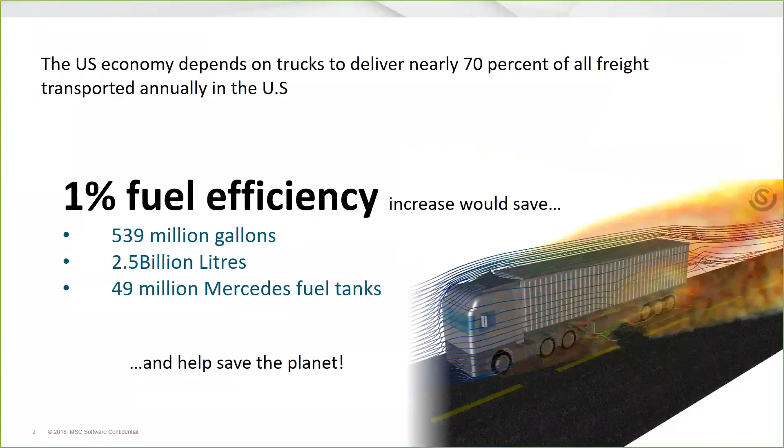In addition, there's a tremendous amount of money to be saved. If you're a fleet owner or operator, the amount of money represented in the savings that can be achieved here is tremendous. So it's in everybody's interest, for a whole bunch of very good reasons, to make sure that the way we're transporting our freight, wherever that is being done, is done so efficiently as possible.

To help that, there's a couple of programs going on, both here in Europe and also in the US. The Environmental Protection Agency, the EPA, has adopted legislation that aims to reduce greenhouse emissions not just by 1%, but by 40% by 2027. The EU is passing legislation right now to reduce emissions too, by 15% in 2025 and then up to 30% by 2030. So, of course, in order to meet those goals, we've got to act now.

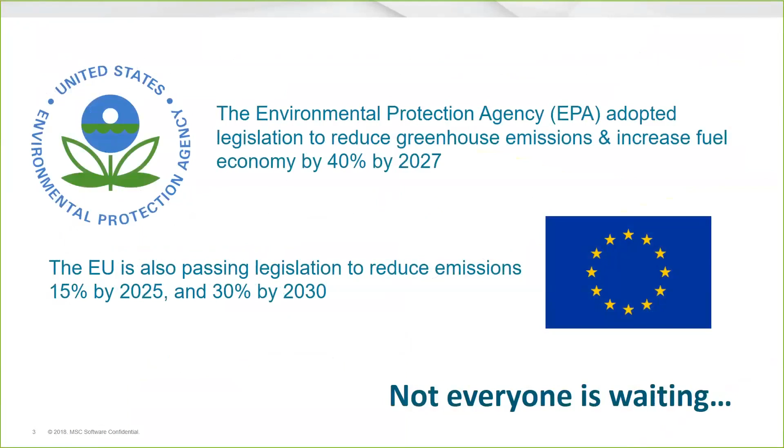And, of course, not everybody is waiting. As I'm sure many of you are aware, one of our customers, we're proud to say, from MSC, Tesla, is also doing this. Many of you have seen the truck that they've put out there, some very innovative designs, doing some very innovative things. So we've got a few companies out there doing something special. But it's up to all of us to try to make this change, not just one leading company, but all of us.

From MSC's perspective, we provide a lot of simulation software, and you can imagine there's a number of areas where we can help, whether it's drivetrain efficiency, electric and hybrid powertrain simulation, sensor and optical systems that typically go with autonomous vehicles, electronics, cooling, lightweighting, handling, rolling resistance, and of course aerodynamics, fuel efficiency, and the environment in which things are transported and people sit are all tremendously important.

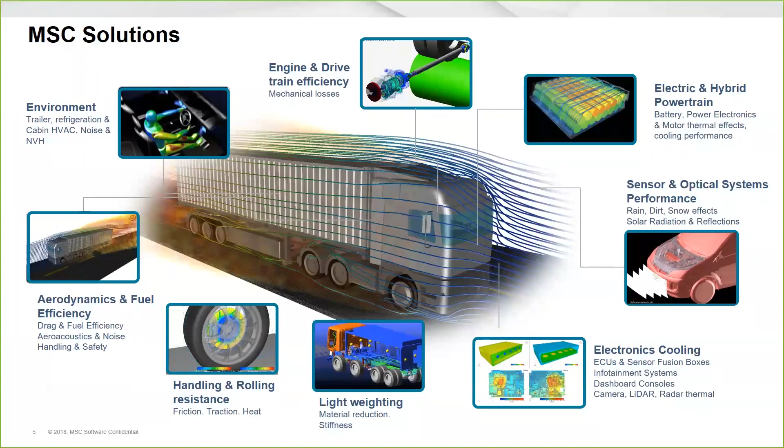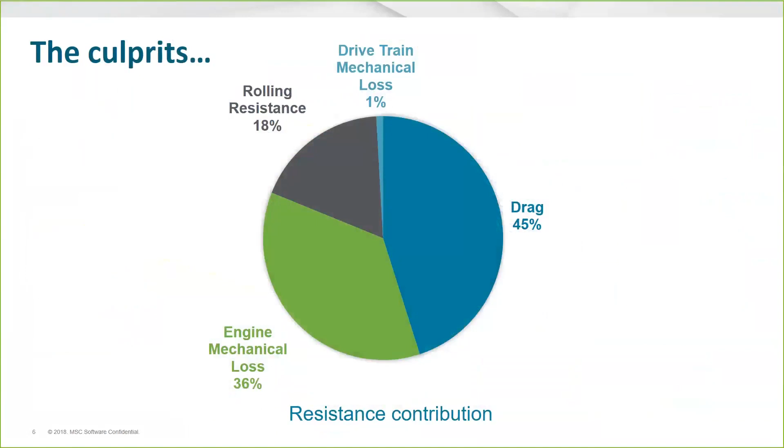But there are a couple of focus areas we need to focus on. When it comes to efficiency and emissions, some of our customers have done research, and there are some major culprits: drag, engine mechanical loss, and rolling resistance are amongst the big ones. From our perspective, we're very proud at MSC because we have two of the major solutions to solving those problems. At a very simple level, we have Cradle, some industry-leading CFD technology that we can apply to this problem, as well as Adams, the world leader in multi-body dynamics. So if things move or there's fluids involved, we can simulate them.

Not only that, we can couple these together in a rather unique way to provide a very rich, combined view of what is actually happening with respect to vehicle performance. So we believe we've got something special, and that's why we believe many companies are choosing MSC to simulate some of these things. So that's enough for the advert here.

Let's have a look at some key technology. Let's give you a demonstration of some of the key things people are doing, particularly around that core problem. We'll focus in on the aerodynamics piece a little bit and have a look at what we can do with some key capabilities we have here at MSC, and give you some insight as to what some companies are doing, particularly around aerodynamics.

So Max, are you still there? Yeah, I'm still here. Shall I pass you the ball and you can present? Yeah. I'm waiting.

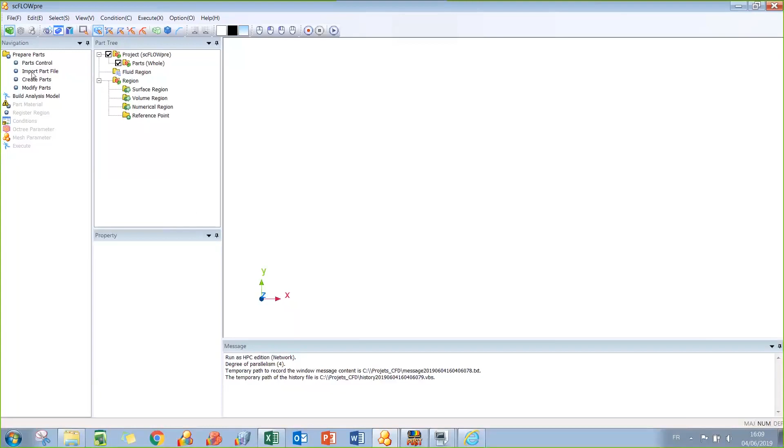For that you can use neutral files such as Parasolid, native files, or so on. In this case I will just take Parasolid. But of course, depending on where you are in your project, if you are very upfront or if you are more advanced, we would recommend you to use different level of detail for your CAD geometry.

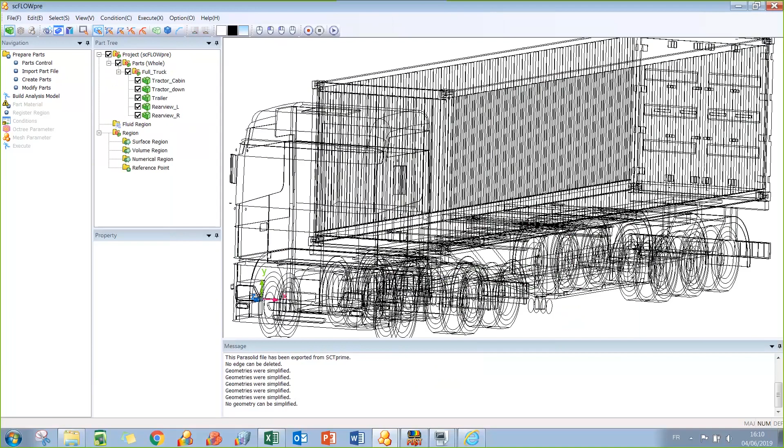If you are more in a design variation process, for sure we will advise you to use a simple model, like the one I'm loading here now on my screen. But of course, if you are more advanced, if you are more looking for validation, we would recommend to put more detail in your CAD geometry.

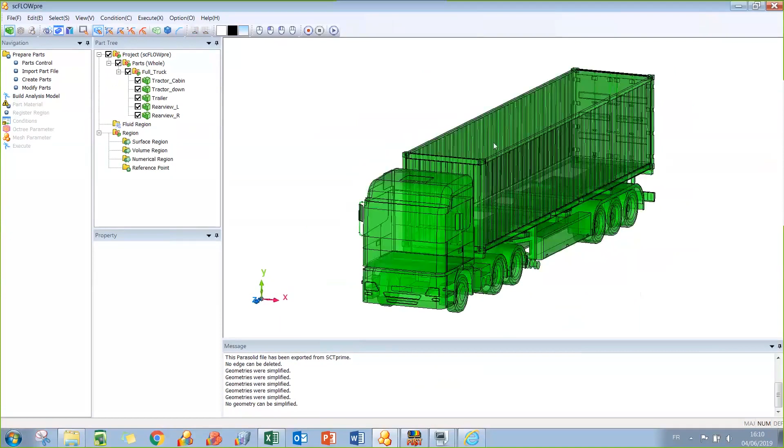So let's try with this one here. As you can see, I have my truck with a few details, but it's a basic truck and trailer model here. Of course, this is what you get from your CAD software. But since we are dealing with CFD, we will also be interested about the surrounding of this vehicle.

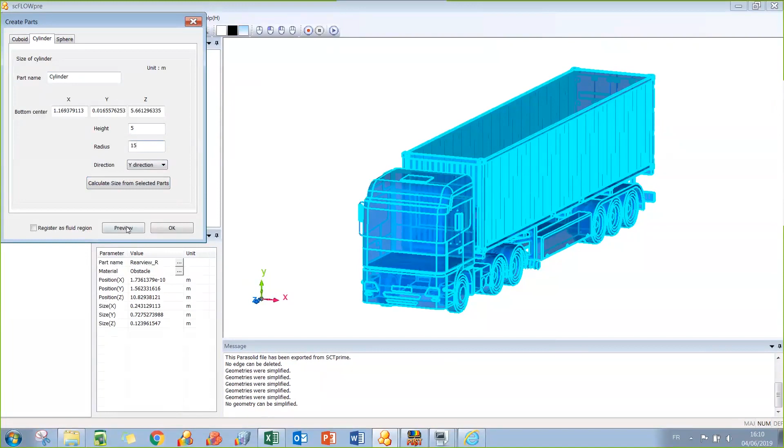So for that, we can create a volume around this truck. Let's say, for example, something like this. Let's check. Yes, I think it's enough for this demonstration at least. So let's consider this volume of air surrounding the vehicle.

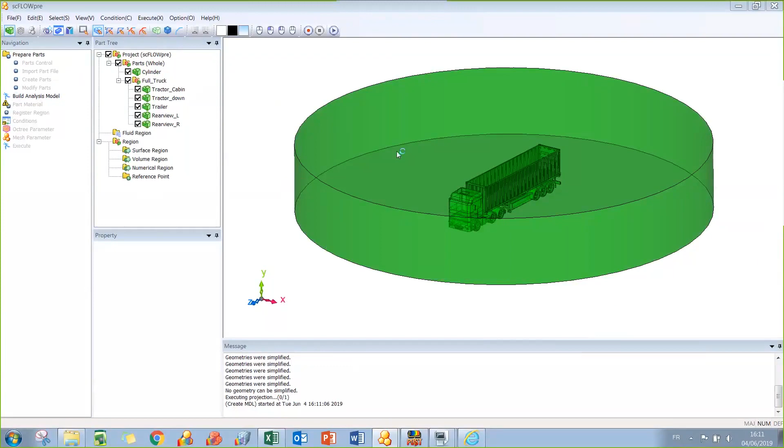And now the next step is about checking if the CAD data is clean enough or not to go till a mesh without any problem. Because, and this is a previous user of simulation solution talking, there is nothing more frustrating than setting up the whole simulation, and then at the final step, the mesh, you get a pop-up message telling you that you have CAD issues, so you need to go back to the CAD software to fix the issues, and then come back to the simulation solution, and then reset up once again.

It means that you have lost your time on the first try. So here the good news is that at this early stage, you are able to check if the CAD data is clean enough or not to go till the end without any problem.

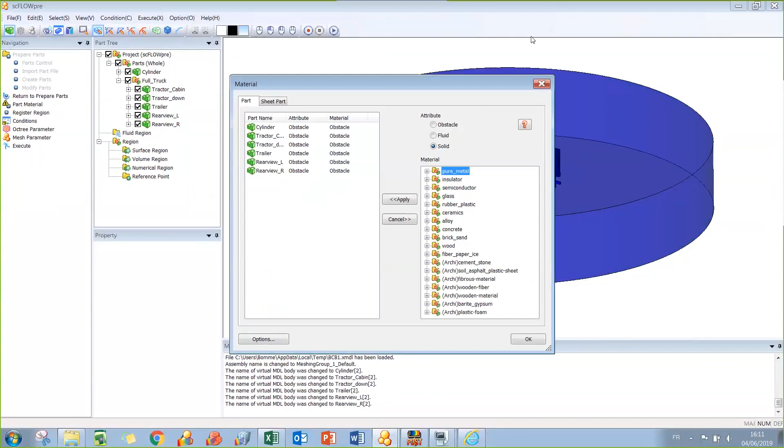So once you have checked this, we'll deal with the material that we want to assign to the different bodies here in the model. In this case, it's very simple because we'll just assign a fluid property for the surrounding volume. So let's keep it simple here, air around the vehicle.

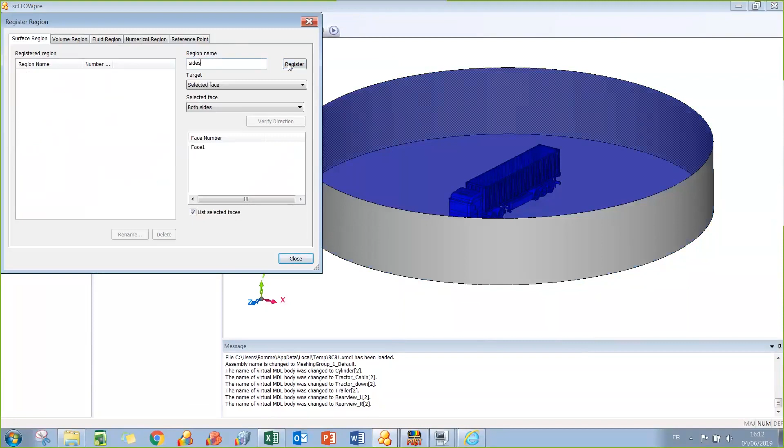Then we'll register regions. For us, a region is one or a group of surfaces that we want to clearly identify. It can be for applying boundary conditions, it can be for meshing purposes, it can be also for post-treatment. So let me show you. For example, here, I will just register the sides, the road, the top, but also the vehicle itself. Let's say, for example, here, as a whole thing, this truck.

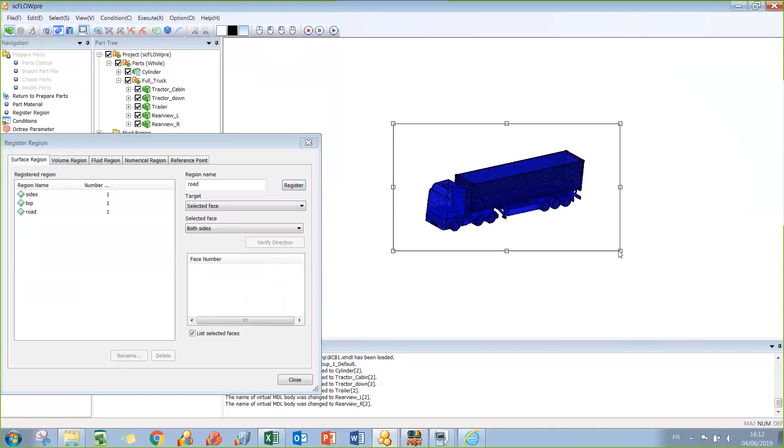Okay, that's it. And now I'm able to set up the simulation itself. So for the setup, we have this wizard, so don't worry, I won't detail each panel that you have here. I will just show you the main ones that can be useful in this specific application about aerodynamism.

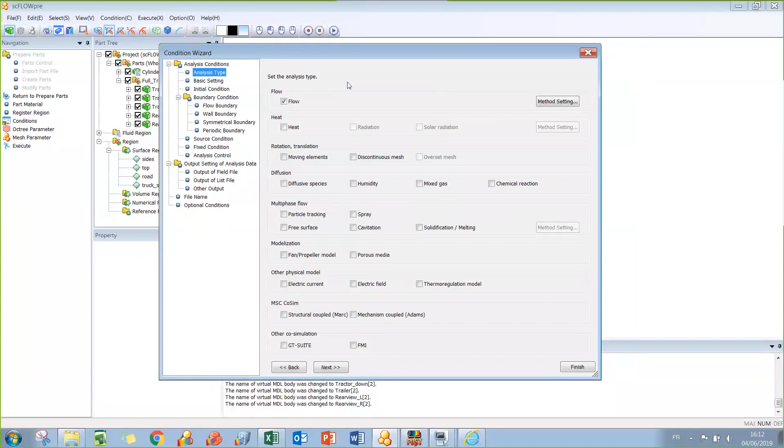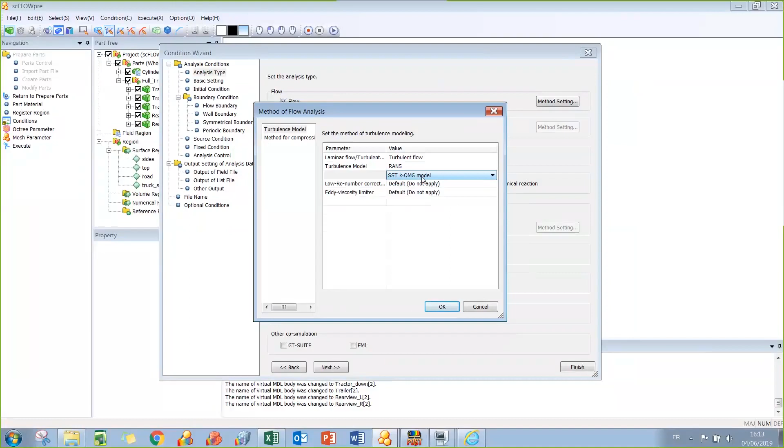So here, the first panel, analysis type, is where you choose what you want to be solved during calculation. For sure, in this case, we will be interested about flow calculation, and you can also go to advanced settings, for example, to choose the turbulence model that is maybe more efficient in your application. The good news is that the default model here, SST K omega model, this is a default one, and it perfectly fits the need for the aerodynamism application.

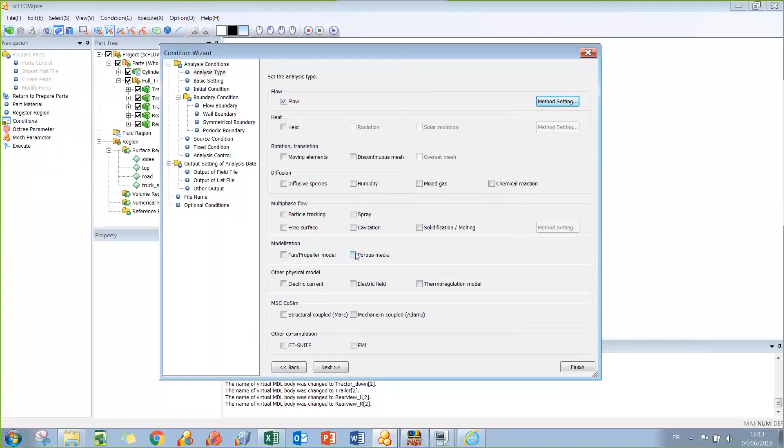So we'll keep it this way. Still in a design variation perspective, I would say this default parameter can be fine. Of course, if you are on another level of detail, if you want something really detailed for validation, maybe you can use more advanced features such as porous media, for example, to easily take into account the influence of the underhood, so here in this case, maybe the cooling system of your truck. For that, you will just consider a resistive volume here, considering the flow resistance induced by this specific area for the airflow.

So this is for the analysis type. Now let's speak about boundary conditions.

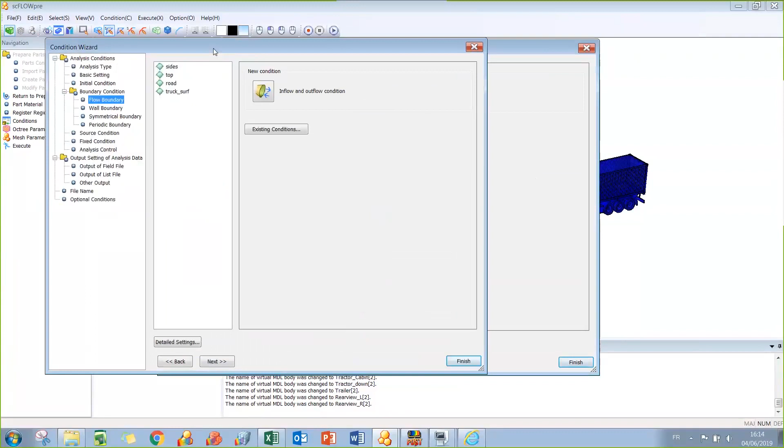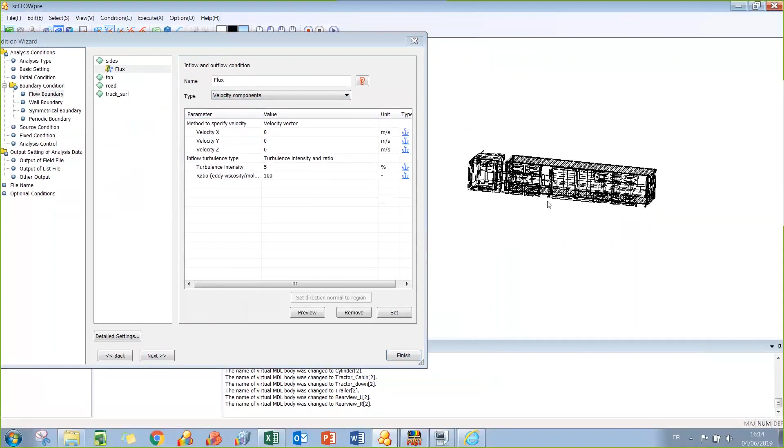Here we rely on the regions that we have registered previously, so we can specify to the solver what's happening around our truck. On the side of our domain, we can specify, for example, the velocity of the wind acting on the vehicle. For this, we'll consider the rolling speed of the truck itself. So let's say, regarding the axis, maybe we have something like 25 meters per second. It's a standard value for experimental characterization, for example. So this is for the rolling speed of the truck.

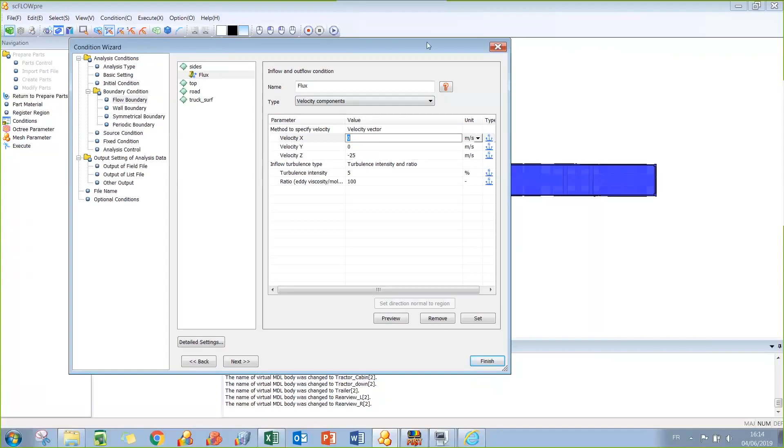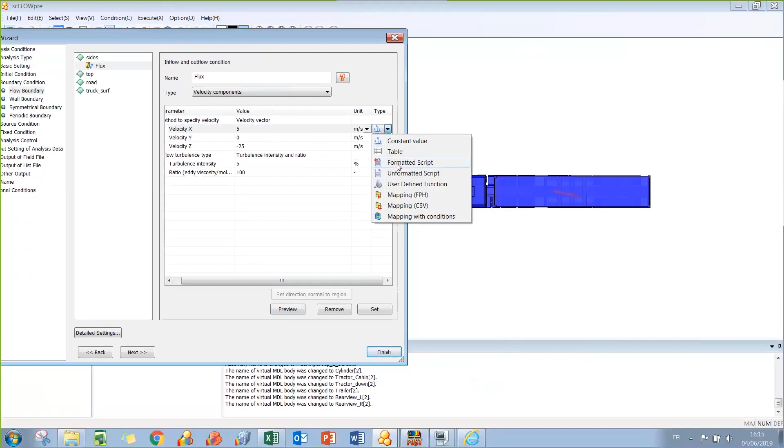But more than that, you also have to consider the natural wind speed, what we call crosswind, because it's not always aligned with the vehicle path. So maybe, for example, let's do it this way: we can consider the rolling speed of the vehicle and, in addition, a natural wind coming this way. The interesting point is that experimentally, you get data from several different wind directions. Here you can set up really easily the range of wind directions you want to test. I've put one value here, but you can easily automate it so that with one simulation setup, you can get a multitude of results corresponding to different wind directions.

So this is for the wind. Maybe on the top level of our domain, we'll just consider something like atmospheric pressure. For the road itself, we can consider that this will be moving according to the rolling speed. That's it, so this is for the boundary conditions.

Of course, you can also access the numerical aspect of the solver if you want to tune it a little, or not. Once again, the default settings perfectly fit the need for this application, so that's good news.

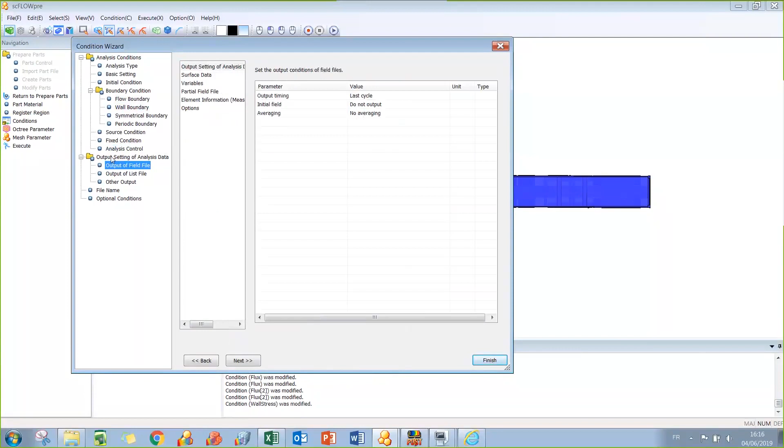Now let's talk about the output we'll get from the solving. By default, you will get pressure distribution, velocity of air, turbulence, a lot of useful information, but you can also ask for more specific results for your application. For example, we can ask the solver to automatically calculate the force applied on our model. This is why we registered the truck and trailer as a region, because we can ask the solver directly to calculate the drag force applying on the vehicle.

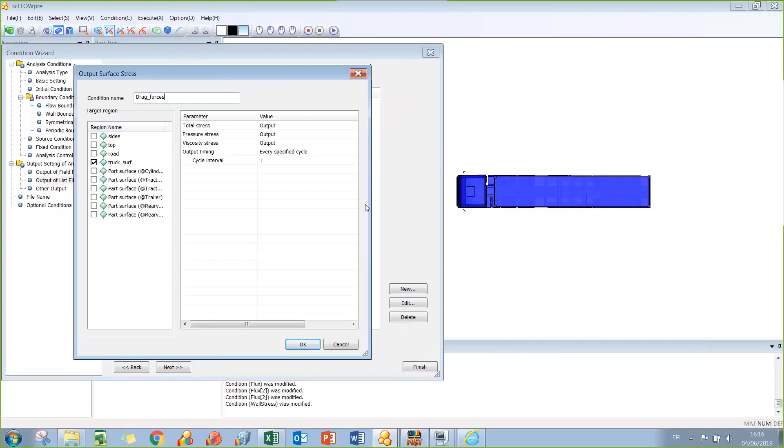In this example, I consider the vehicle as a whole, but you can certainly split your model into different areas if you want to look in detail, for example, at a device you want to put on your vehicle to reduce drag force. So this is about the setup.

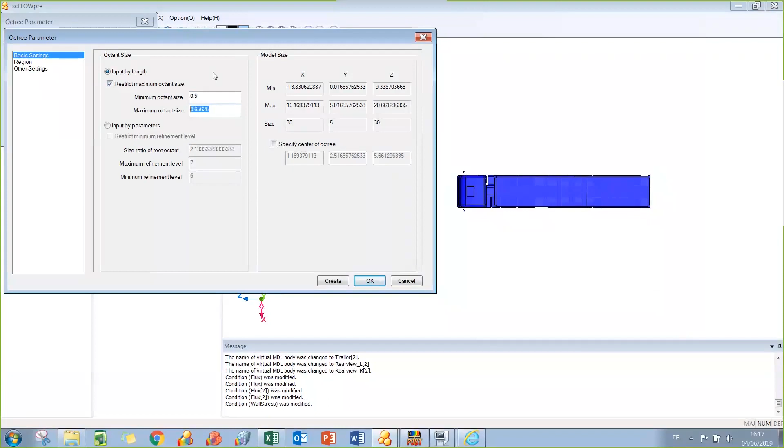Now let's talk about the mesh. For the mesh, we do it in two steps. The first one, we will set the local mesh densities on the model. For example, let's use a cell size between 0.5 and 1 meter elements.

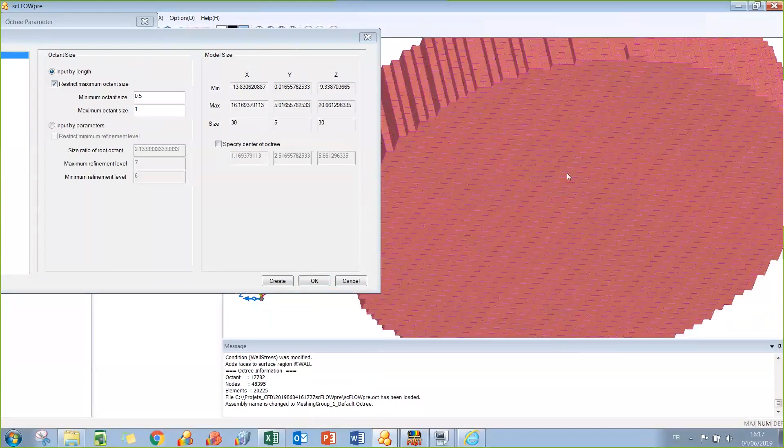Let me show you a quick preview of what that means. Don't worry, this is not the mesh we'll actually use for solving, it's just a preview to get an idea of the coarseness or fineness of the mesh. With this kind of cell, we'll miss a lot of accuracy, especially around the truck. That's where the regions can be helpful, because we can ask for specific regions or volumes to have a finer mesh.

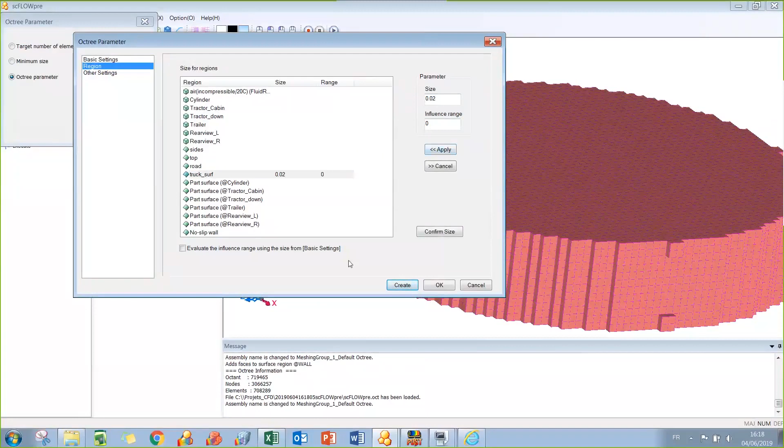So let's say, around the truck itself, I want something finer, like a 2 centimeter element. I'll just recreate this preview. By the way, we also get an estimation of the number of elements, so we know if we're creating a monster or a light simulation. Let me show you what we get around the truck. As you can see, with these parameters, I get something finer around the truck, my main point of interest in this application. So this is for setting up the local mesh density in the model.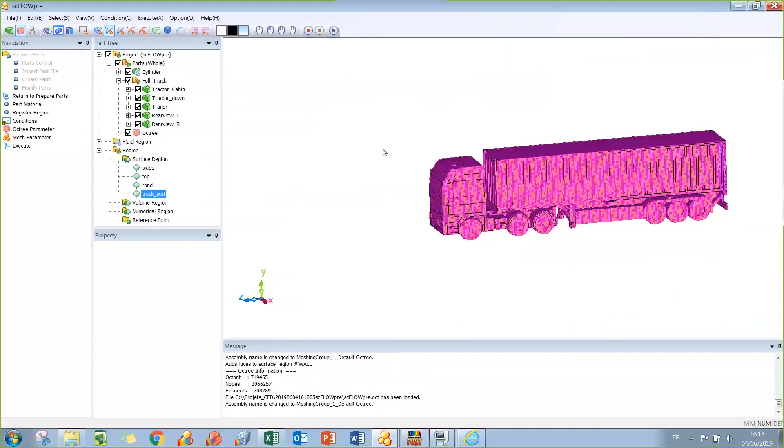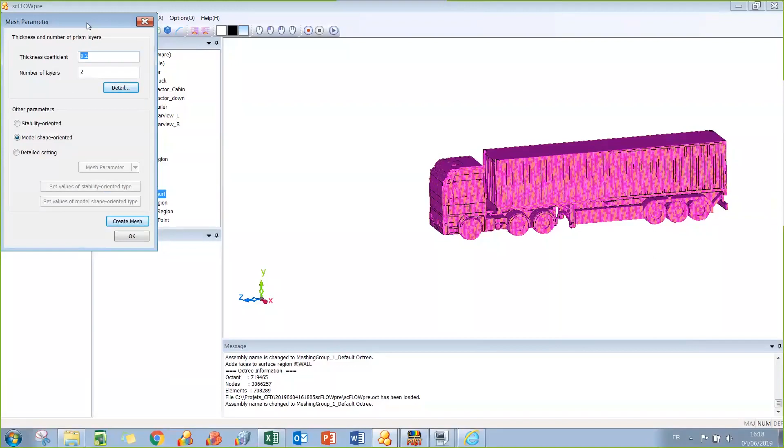Now the second step is about the mesh itself. For the mesh, we use polyhedral mesh at the core of the model, and near the walls, near the boundaries, we'll use what we call prism layers. This has a higher aspect ratio that helps us really catch the physics occurring near the walls. For example, near the surface of the vehicle, we'll get huge gradients of velocity, pressure, and so on, so to catch this physics, we use this kind of element.

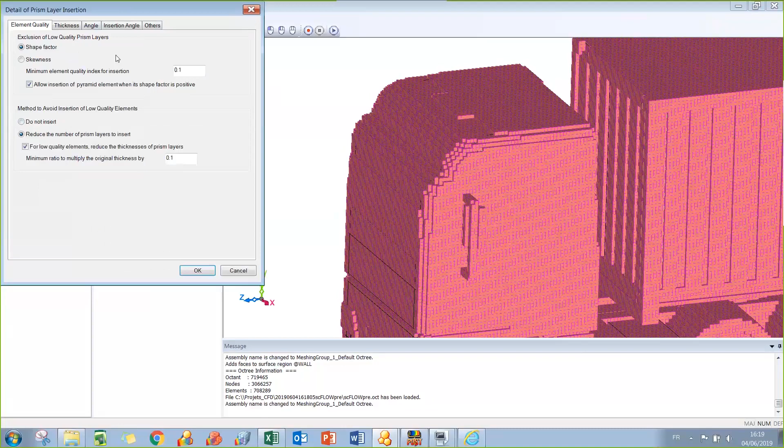And then we can specify here the number of prism layers that we want to use near these walls. We can also rely on existing pre-configurations already saved in the program, but you can also access and tune your own parameters. So you can access any kind of parameters that you can imagine to check and control the quality of elements in your mesh.

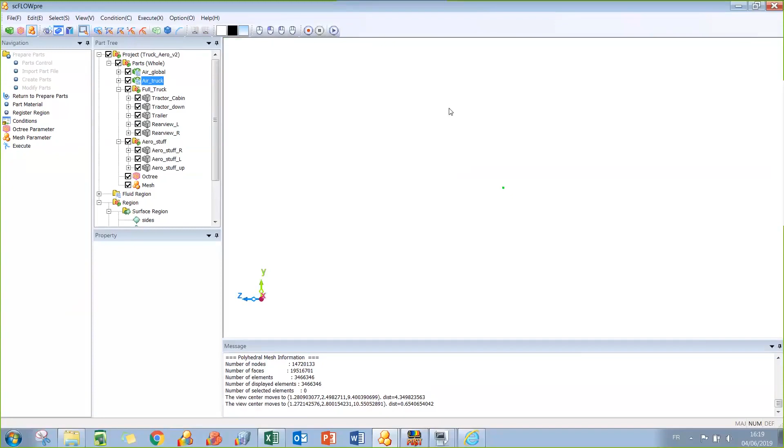Let me show you an example of mesh that we can use especially in this case. This is the same model of truck. As I said, we have polyhedral mesh at the core, and what I just described, prism layers, in order to catch high gradients of speed or pressure near the boundaries.

At this point, everything is ready for calculation itself, and during the calculation you will get a kind of log file like this one. In this log file you can find the drag force that we have asked the solver to output. You can monitor the total drag force applying on your model, so here on my vehicle. This drag force is directly something you can use to quantify and check if your solution is aerodynamic or not.

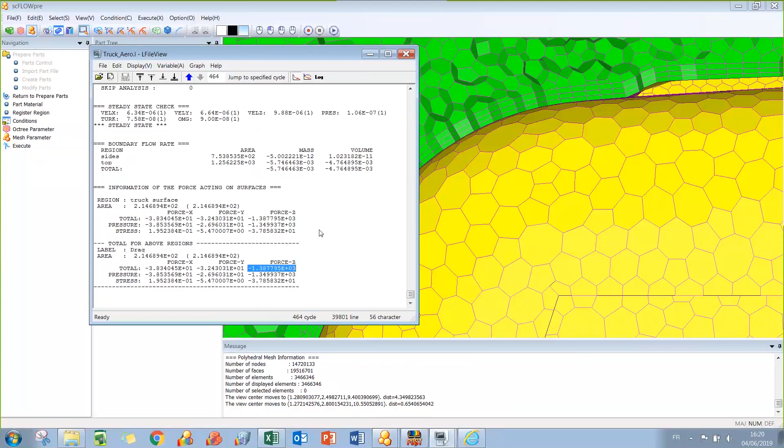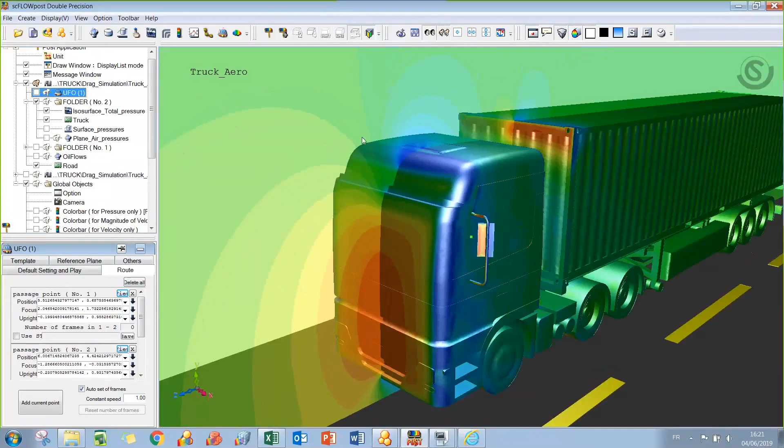Of course, after the calculation is complete, you can access the post-treatment itself, like here. We can check, for example, the pressure level on the truck itself or on the air. High pressure level stands for airflow resistance and energy losses. We can check this pressure, and we can also check low pressure level in the air, also standing for pressure energy loss areas.

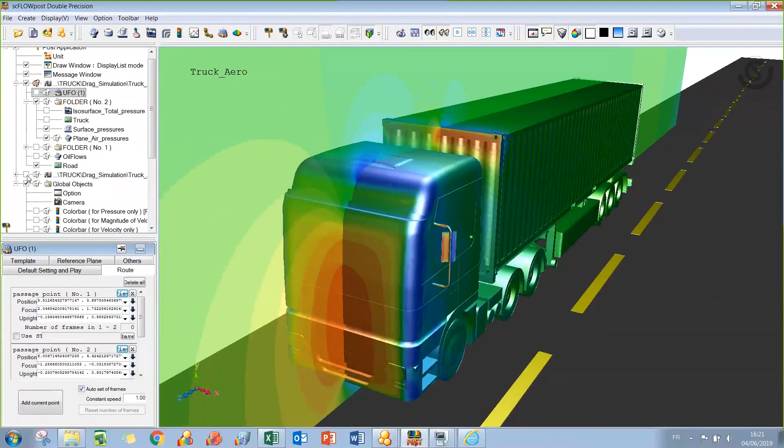Let's come back to the pressure themselves, and let's consider that we are in design variation. So maybe we have run a few different configurations of this truck rolling. We can easily compare directly different configurations.

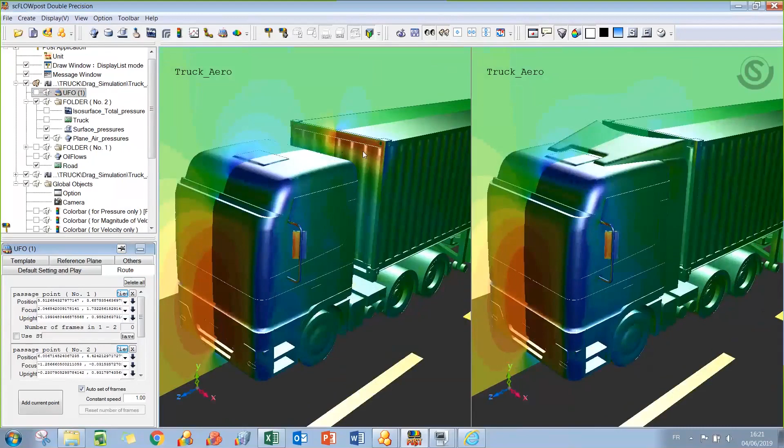Let's say, for example, in this case we have a configuration without a cap and here with a cap. We can directly check if this device is efficient or not in terms of pressure applying on the truck. Once again, the pressure stands for energy losses, and thanks to this we are able to check if these devices are worth it or not. This is completely the idea of design variation, to check if something is going in the right direction or not.

As you can see here, for example, we have high pressure areas here and here. Thanks to this device, this fairing, this simple fairing, we have suppressed this area of trouble in terms of aerodynamism. So it's very simple to check if we are going in the right direction or not.

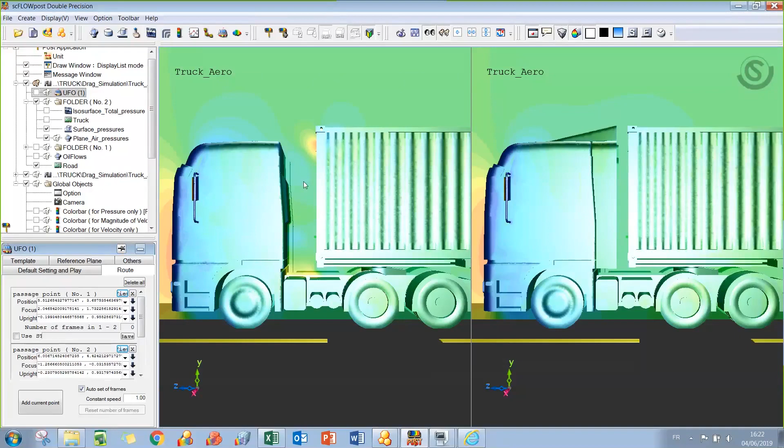But more than that, we'll also be able to directly quantify the amount of benefits, if any, in the implementation of this kind of device. As you can see, you can directly compare from the first configuration without the fairing, we get an amount of force acting on the truck. And here, with the configuration including the fairing, we can see that the force is reduced by something like 20%. And these calculations are really fast to run.

For example, on an 8-core machine, one single calculation lasts something like 45 minutes. So as you can see, it's not a big deal. And in this, let's say, one hour, you are able to check if this fairing is worth it or not in terms of aerodynamism.

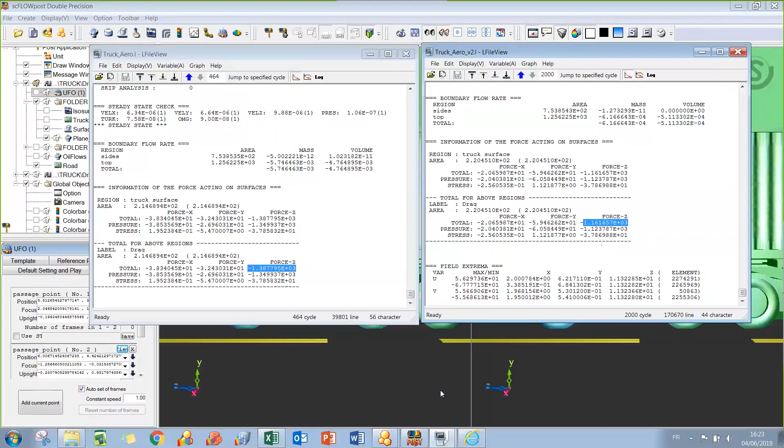Hopefully you can see my screen again. So a simple demonstration, a very interactive demonstration of what's possible with something like CFD. There's a few hints and tips that Max provided, a few levels of automation that we provide. Obviously, a relatively simple demonstration, and no co-simulation there. We didn't do much in the world of optimization, for example, and we didn't do much in terms of automation that can be applied. We'll come back to those things in a minute. It's just a simple outline of what's possible.

All right, so let's start looking at what real-world examples are out there from what real customers are doing. One of my favorite examples is actually from my Japanese colleagues with a company called Hino. Here they're doing truck and bus aerodynamics as well. Just like Max said, they're also doing a lot of drag, crosswind forces, that kind of work. But they're also looking at what's going on inside the vehicle, particularly around the engine and some of those other areas that were outlined at the start of this demonstration, to improve the situation. Things like catalytic reduction, particulate reductions, as well as the refrigeration systems themselves around these vehicles.

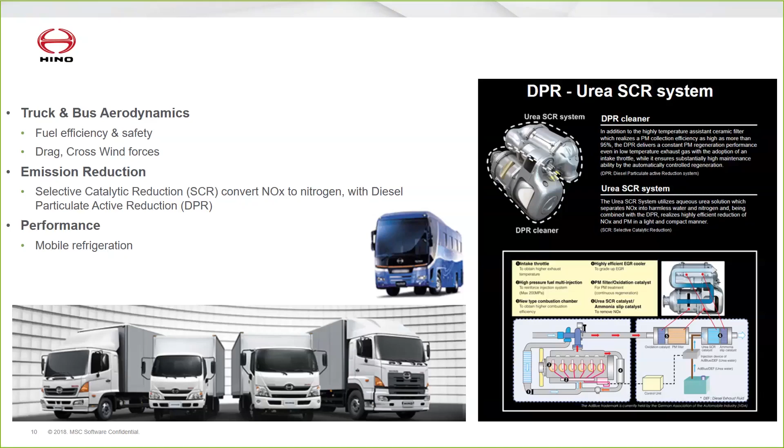It's not just one thing that's going on. There's a number of things combining to impact the overall efficiency of these vehicles. And it's that kind of idea that Hino have embodied very well.

So on one side of the equation, they've spent a lot of time looking at the processes they have around the aerodynamics of their vehicles. Like Max said early on in the process, they're doing relatively simple design shape variations. Then, as their designs come into more focus, they're adding more and more detail and validating more and more. The designs up front are quick, simple, relatively dirty to get overall design intent working. Designs later on, obviously there to quantify specific design ideas.

You can also see that particularly around those validation points, they're comparing back to simulation, to actual physical tests as well. So what they can do is reduce significantly the amount of physical prototypes that they do and correlate those together. The result is a pretty powerful one, right?

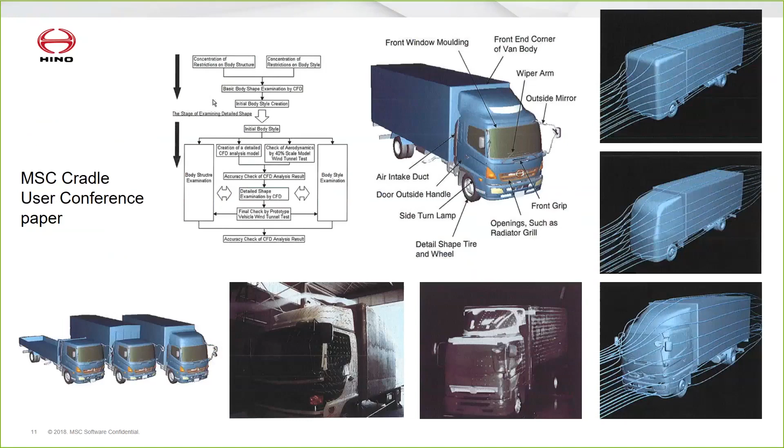In addition to simulating crosswinds and being able to understand different variances in geometry, they're also able to map out the drag coefficient against fuel consumption for their prototype vehicles for different configurations of every vehicle that they have. That's pretty powerful stuff. This enables them to make design decisions before anybody's actually in production and try to address some of the key things their owners are going to be looking for. Fuel consumption being a key one, and increasingly, it's going to be emissions calculation information moving forward.

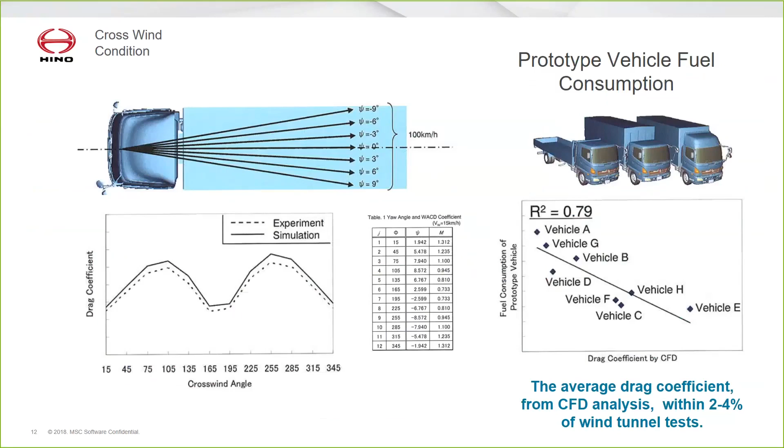You can also see from this slide some of the correlation they've got with their actual wind tunnel tests, 2 to 4%. That's pretty accurate. So a really nice example of aerodynamics as well as some detailed examples around the engine.

Speaking of engines, another example I particularly like is from ISUZU. Here, ISUZU have embedded quite a bit of detail into the CAD solution themselves, choosing to take their standard processes and make those processes available to more designers and engineers, removing the restrictions around some of the usage of these tool sets, since some of them can be a bit complicated. So all of a sudden, we're enabling regular design engineers to get access to these tool sets and start producing standard simulations again and again and again.

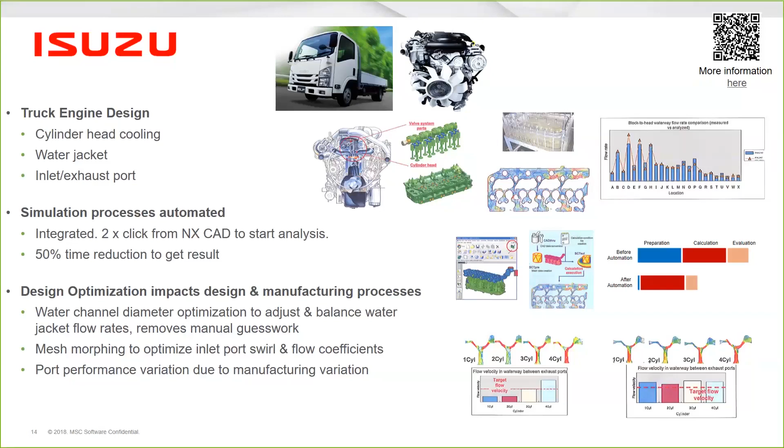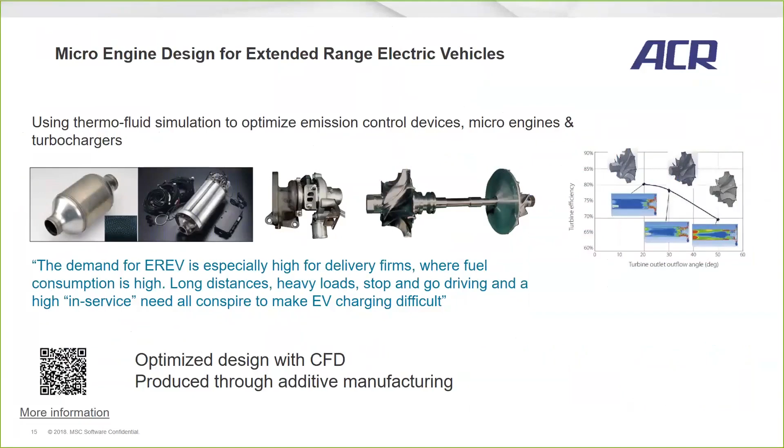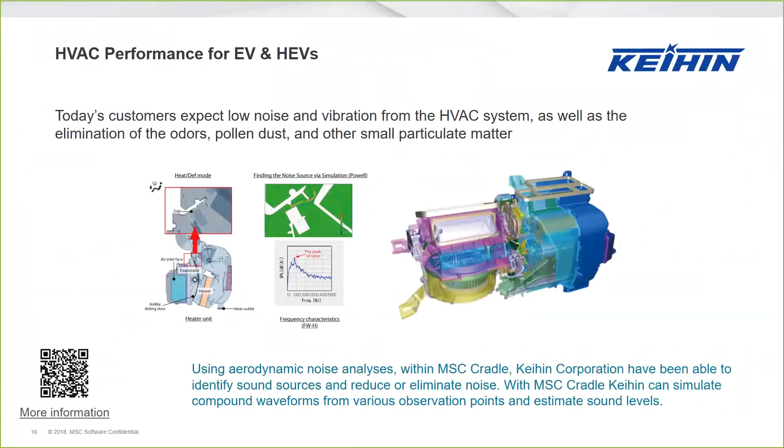Simple example there, really nice example. All of a sudden, you've got quieter vehicles. All of a sudden, things like HVAC become increasingly noisy. It's obviously very fluid examples so far.

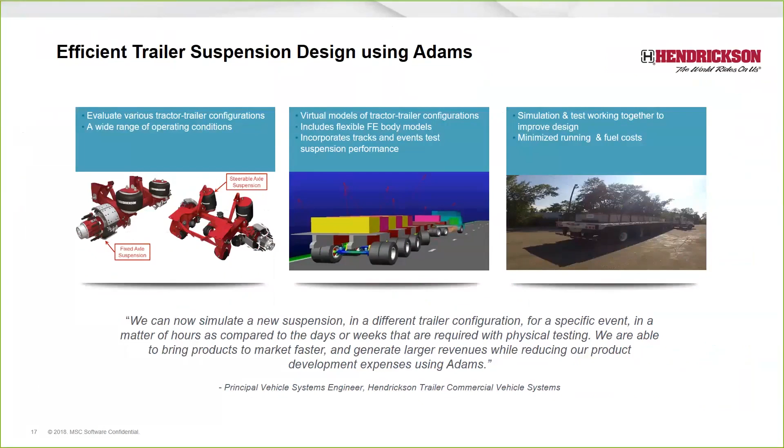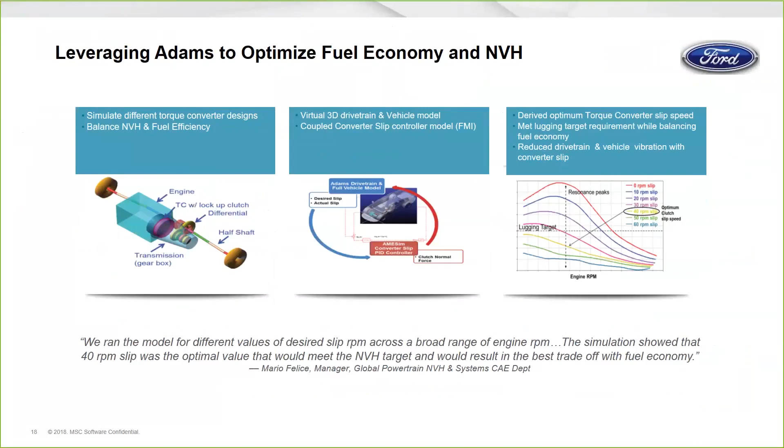Another great example here, bringing together that engine viewpoint, is from Ford. Here, leveraging Adams in this particular case to optimize fuel economy with NVH. So being able to simulate different torque converter designs in the engine and the drivetrain to optimize those, make them as efficient as possible, and really balance what's going on in the system, particularly bearing in mind some of the converters that they've got going on. That way they can optimize torque converter slip speed, and balance fuel economy and noise. Some really quite interesting use cases in this particular example.

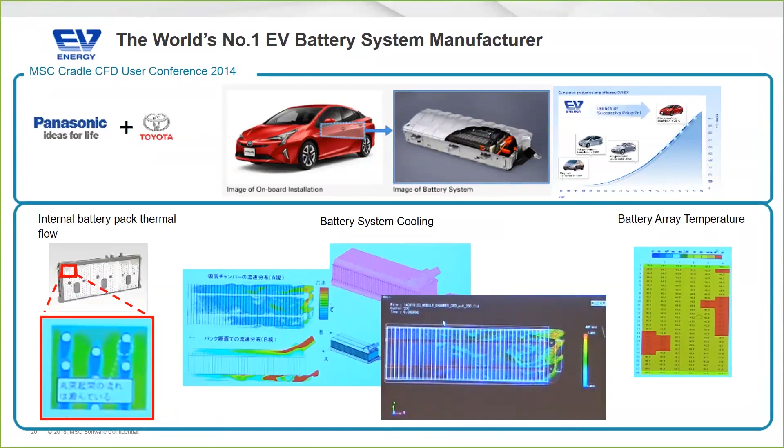Another great example that we've seen back in Japan is what's been going on with Toyota and Panasonic. In both cases, great users of our solutions, particularly for CFD, now getting together to produce one of the world's largest providers of electric batteries. In this particular case, we're using a Prius. This is from the Cradle User Group Conference 2014. If you drive a Prius, then you'll be glad to know that MSC helped simulate the Prius itself for the cooling system that goes around the electric battery. The battery itself is produced by Panasonic, another great user of Cradle. They're simulating the flow through the battery, so both through the battery and the cooling system around it. We've got quite a nice set of capabilities here to optimize the engine. So, all nice case studies.

What are the lessons learned? One of my favorite papers on this particular subject is from the International Council on Clean Transportation in the US. They've derived something called the US Supertruck Program. I'll bring that up so you can see it.

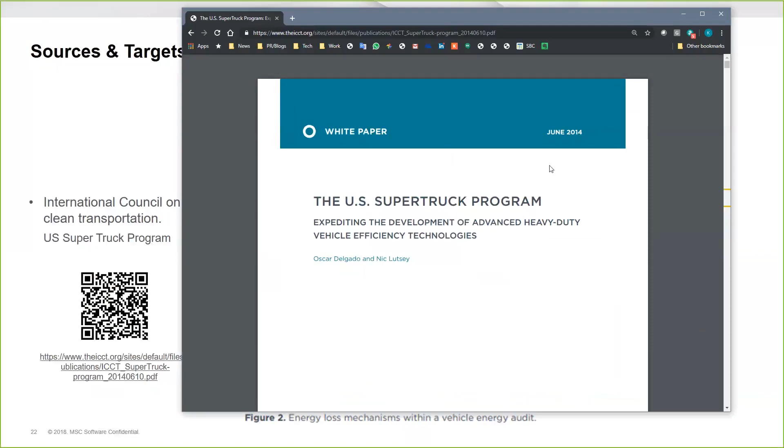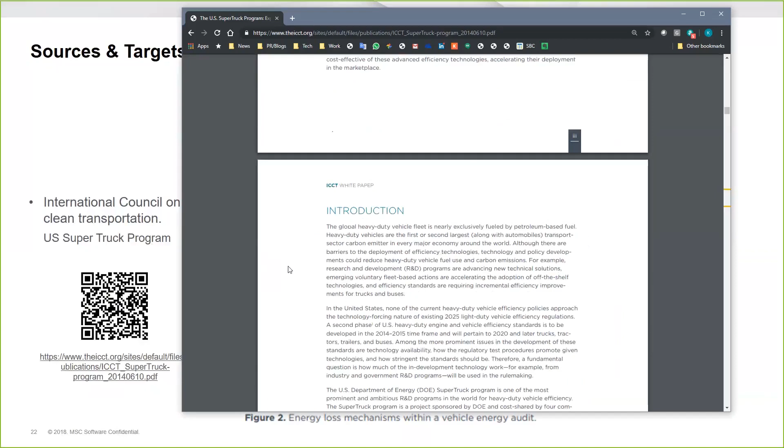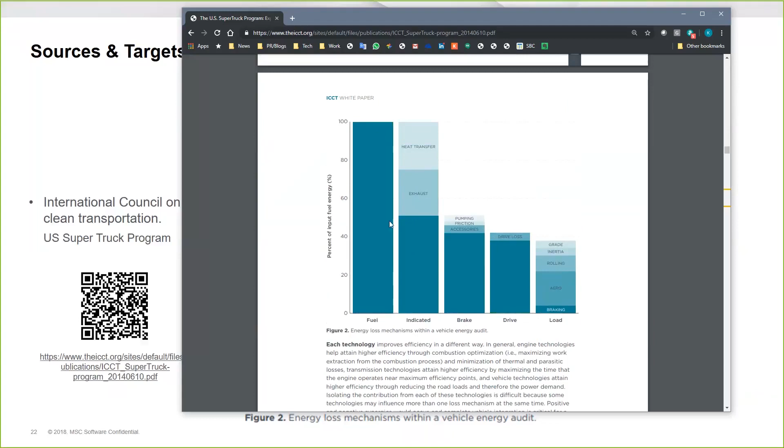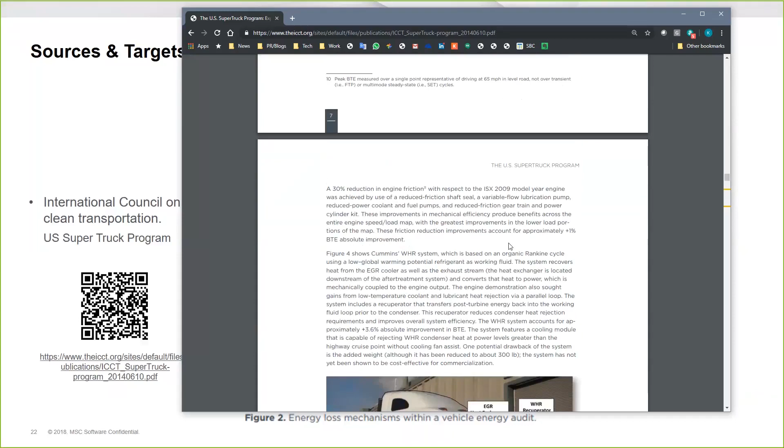And it's got some great detail on that. Here you can see the breakdown of the energy that comes from the fuel to where it actually ends up, what happens in the braking area, drivetrain, loading, and so on. So it provides some really neat examples of where we can find that efficiency, some good examples of specifics around what some of these leading companies are doing.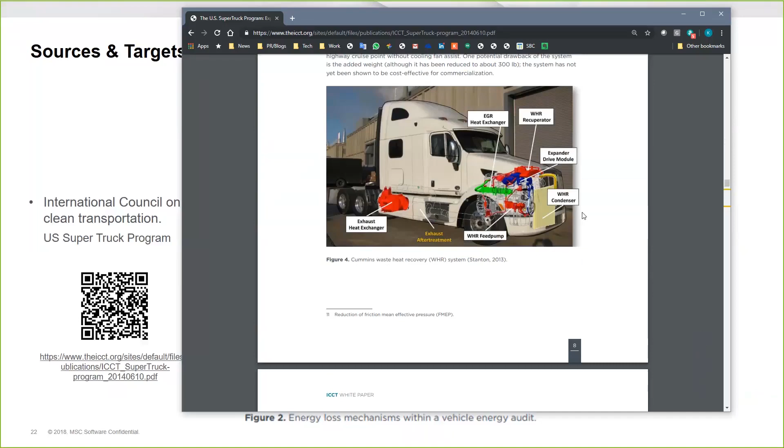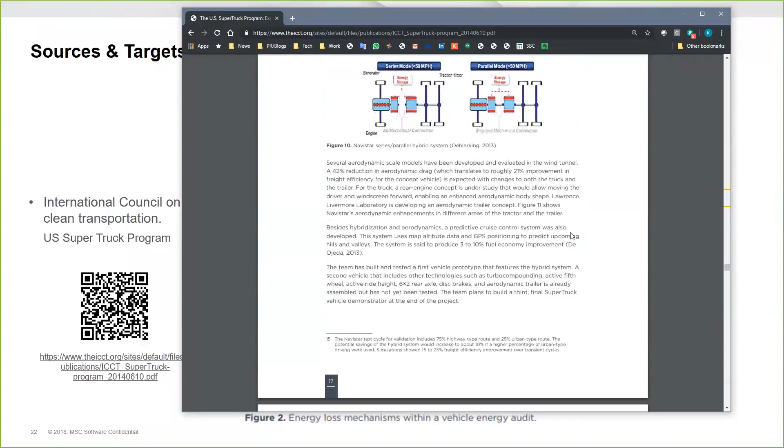In terms of engine design, you can see some of the equipment and systems around the engine that has to be balanced, as well as aerodynamics, for example, and other leading things. So it's a really nice example, really nice white paper - if you haven't seen it, I recommend it. You can see some great designs here with aerodynamics. Worth a read if you haven't seen that already - the International Council on Clean Transportation. Great paper, there's a number of other papers like this.

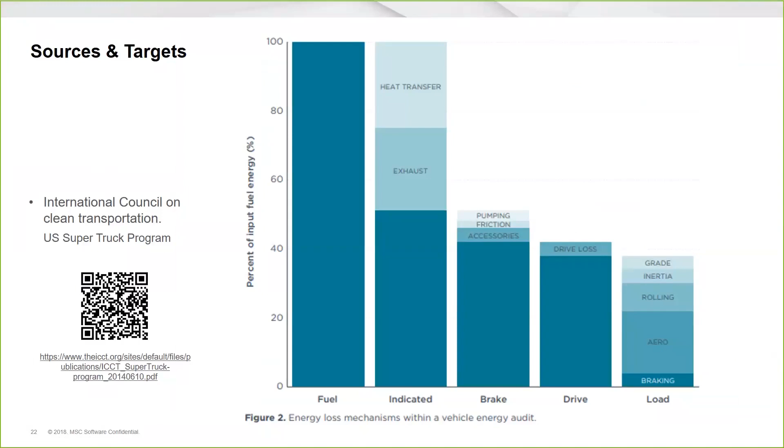This happens to be my favorite, because as you can see in this particular chart, it's not just about aerodynamics. However, I do lead CFD here in EMEA, so it's not all about aerodynamics, but this particular paper does outline that one of the most cost-effective technologies that can be applied here are those related to aerodynamics, in particular the combination of truck and trailer. I know this is kind of obvious in hindsight, but we've got companies that make tractors and companies that make trailers. Unfortunately, in order to move something, it's the combination of these two that has to be considered. And it's actually the trailer that has a huge impact on the efficiency around aerodynamics and drag. The combination of truck and trailer is obviously what needs to happen here.

So you saw one simple example from Max earlier with his very simple simulation where the roof fairing and the cab are more closely matched to the trailer.

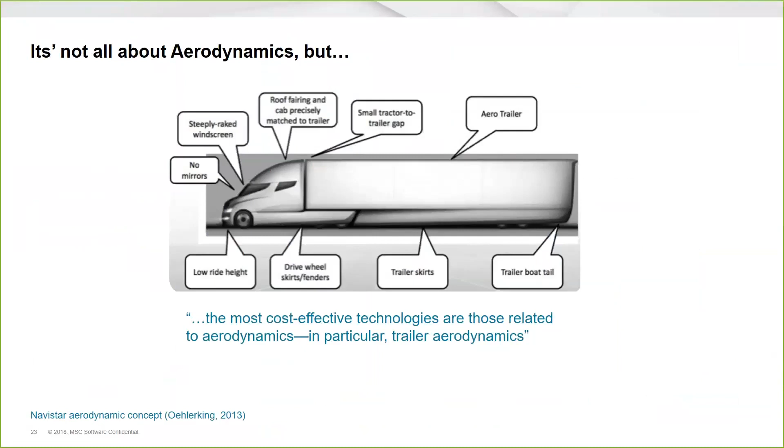There was a small tractor to trailer gap as well, and you could also see a few other things going on, but that was a key point that brought out in a very simple analysis that Max did.

We can also see some other simple rough guides here. The idea of what to do when iterating on designs versus validation is also key. We don't need to do a full-on transient, time-based simulation at every point in the process. It's very possible to undertake simple conceptual simulations quickly to give comparative direction in the design process, and you could see at least one of our companies trying to do that, enabling design engineers to make decisions quickly and simply.

You can see from other examples where they're using validation, where they do need quantifiable improvements. This is going to be quite a focus as more regulation comes in. I'm sure those of you based in EMEA are aware of some of the tool sets coming in with the EU regulations. One requires manufacturers to start sharing performance characteristics with users and operators. So validation is going to get really important. Being able to provide actual figures of drag, either simulated or tested, is going to matter moving forward.

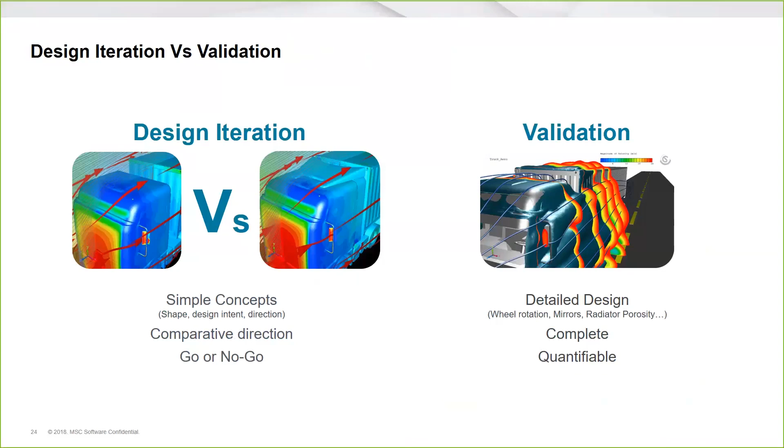We also saw some other examples here. Max brought in a model that wasn't too large, a parasolid file if I remember correctly, but particularly when you get into the validation portion of things, the data that can be brought in can be huge. In addition to that need to automate processes and make things simpler, we have an ability and need to document processes generally.

In this particular case, there are two levels we see. There's the documented process, where somebody has written that process down and we go through simulation as a matter of rote. That's great, it's great that we have a process, that people know where it is so they can get the simulation done and access the software they need. But we're also seeing increasing need to automate that.

So one example where we did exactly that, and then we enabled many more people to do much more simulation. In addition, processes like importing data and cleaning up models, which inevitably has to happen, get a lot simpler. So as we document processes, the next logical step to get internal efficiency improvements and simulate more is being able to automate them.

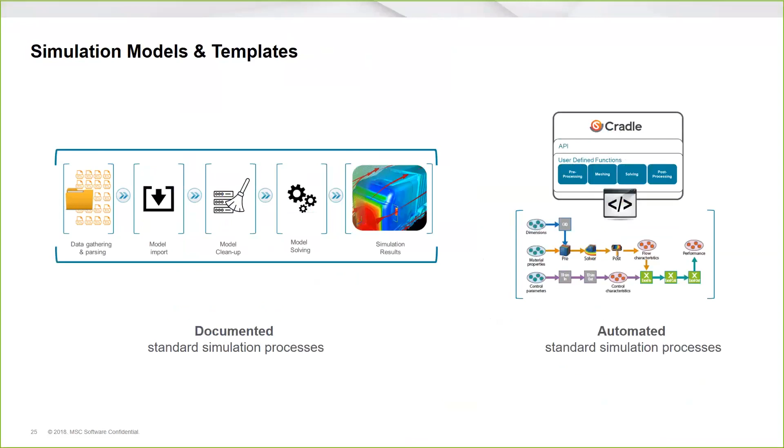Along with that idea, the idea of optimization. In Max's case, that fairing he applied could change shape, could be a subject of design variation. Being able to understand different correlations and contributors to something like drag is an important idea, and that's a key part of increasing AI platforms—being able to mine data, understand how different physics interact with each other, and balance those things. A simple example earlier.

If we look at engines, increasingly they're surrounded by more equipment to make them cleaner. But more equipment adds more weight to the overall engine. So some of the improvements from cleaner engines get offset by the fact that they're heavier and therefore need more fuel. Being able to make a balanced, quantified decision like that is part and parcel of tools like this, where we can start to understand how these things interact.

Being able to do this automatically is increasingly important as well. We saw at least one example where this was happening around design variation on inlet ports—if you remember, they were using a tool like this. That's an important learning as well. Being able to optimize these things, building on the automation hopefully you've embedded, building on the processes we have, is a key part of what we need to do to keep improving.

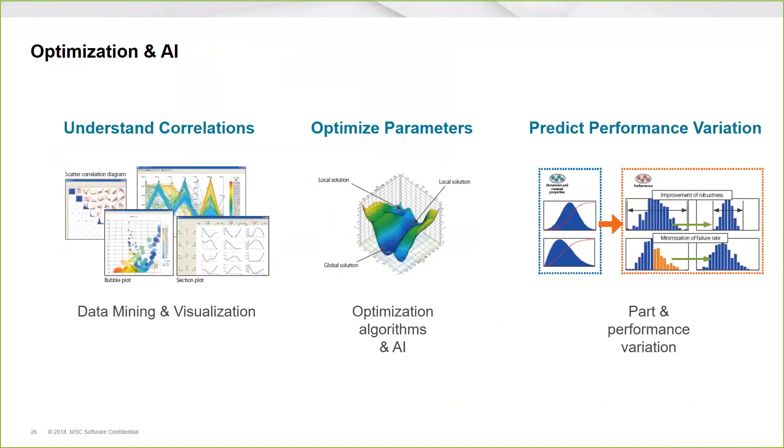So some basic lessons learned here. Taking a step further forward, getting started is usually the biggest barrier. For us, we're quite proud of the fact that we have a whole range of solutions that can be applied to many of the problems here. Now, in this presentation, we focused rather heavily on aerodynamics and provided you a demonstration of that.

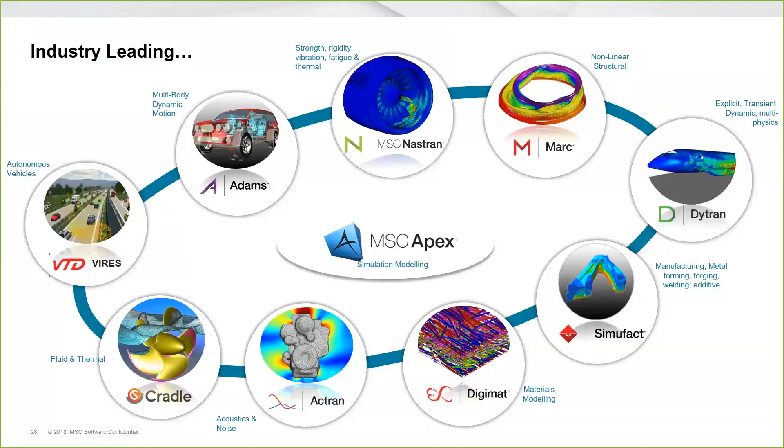Yet getting access to these tools can be a challenge—buying every single one of these softwares from different vendors can be difficult. That's why we introduced something called MSC One. We believe it provides a much smarter way to purchase software.

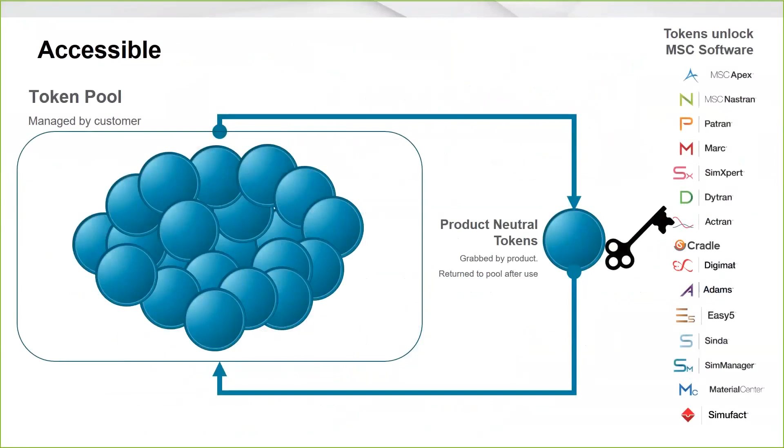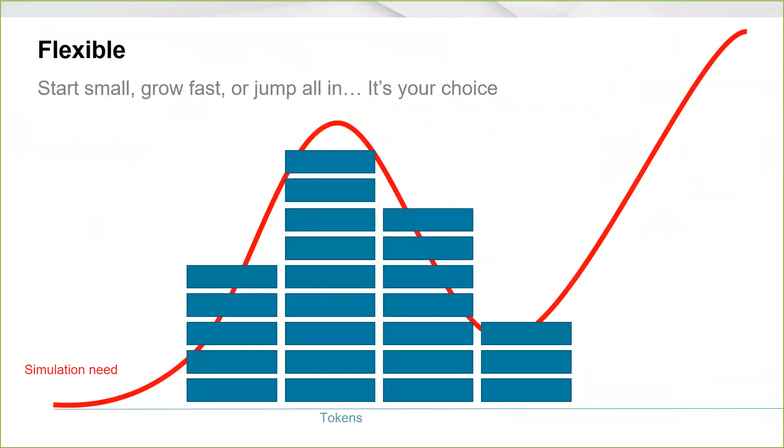MSC One lets you just buy a number of tokens, which can be used across most of our product sets whenever you need them. This gives you huge flexibility—you're not buying one set of tools, you're buying access to them all, and you can ramp usage up or down accordingly. You can even rent tokens for as little as a month, getting access to the tools you need exactly when you need them.

We also talk a lot about how to get started with us. On one end, we could just hand you the software and let you get on with it—most of our software provides great training in the box, either as online courses or within the software itself, plus a strong community and smart personnel once you buy. But the challenge is that most people's day job isn't, and shouldn't be, spent learning software.

So on the other end of the spectrum, there are simulation services—we have very smart, experienced folks who can undertake simulations like the ones we've just shown you. But the trouble is that doesn't leave you, our customers, with the intellectual property you need to drive your designs forward, so we don't particularly like doing that.

Where we find the best solution is in the middle, something called a jumpstart. After a simple briefing based on what you need, we give you training based on your specific use case, and the last day of that standard training is usually spent on your own geometry, working your particular problem.

Over the next month or so, depending on what you're doing, we provide supporting days to help you get your problem solved, and at the end of that period, typically about a month, we give you a report. We charge for training costs before you get stuck into the software and purchase it, so that jumpstart is tremendously useful.